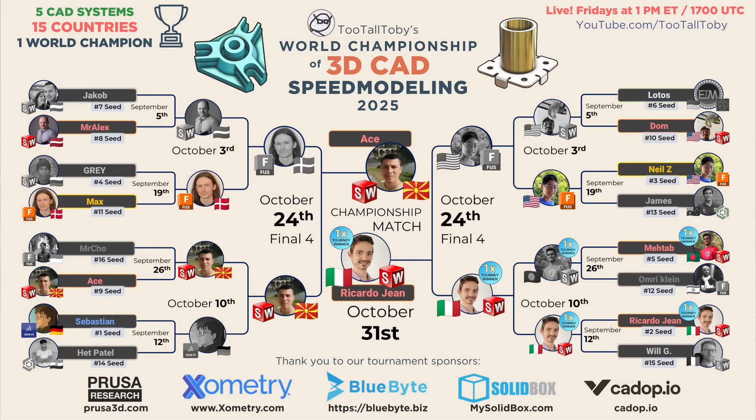All right, here we go into Battle 2 of our 2025 World Championship. Remember, you got to earn 3 points to win the title of World Champion. Ricardo Jean has 1 point. Ace has 0 points, and so every point counts.

Guys, this is one of the most memorable matches in the entire tournament. This is one that definitely left me feeling very emotional. So as you're watching, be sure to let me know down below in the comments what you think about this match. If you've ever felt the way our contestants felt, I'm trying not to spoil this, so I'll just let you watch this and enjoy it. But this is definitely a memorable one.

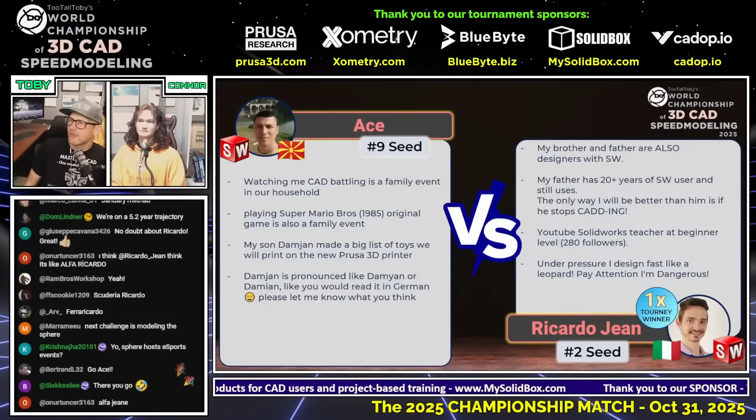So here we go. This next CAD versus CAD battle featuring Ace from Macedonia, our number 9 seed using SolidWorks, going up against Ricardo Jean from Italy, our number 2 seed running SolidWorks. Ricardo has 1 point so far. You got to get 3 points to lock up the championship of the world. Here we go. This next CAD versus CAD battle begins in 3, 2, 1.

Go! What is the mass of this multi-body part or assembly in XXX.x grams. The tolerance is plus or minus 0.1 grams. This is a multi-body part. This is a shelf that I saw when we were at PDX in the hotel. They had a shelf like this in the bathroom. There is a note on this thing.

You can see that there's a note that says, no Ivan exploit for the hole locations. Countersinks must be located properly. So no Ivan exploits for the hole locations. Of course, you can Ivan exploit anything else if you want to, but not the hole locations.

All right, this is a tricky part, a multi-body, multi-material part. This is our second part here in our World Championship. Both of our runners have already grabbed a screen capture and are already modeling. We can see that Ace is modeling this thing looking down from the top. We see Ricardo Jean, looks like he's probably doing the same thing, but it's interesting - it looks like he's actually working on the front plane, but sketching up that L shape.

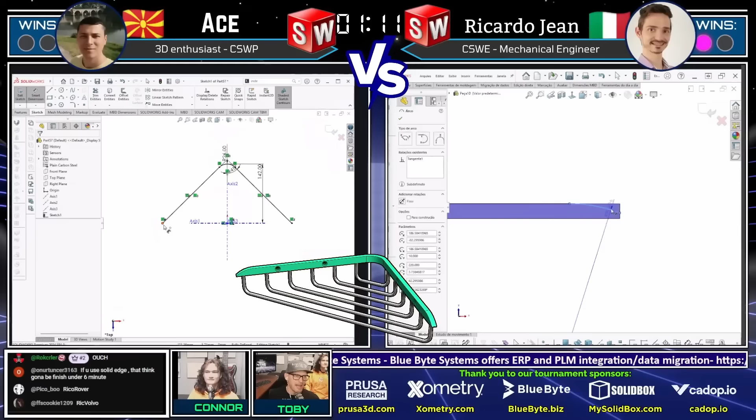Very interesting. Ricardo drawing first blood here, on the right from Italy using SolidWorks. Wow, Ace on the left decided to include that radius in that first sketch. I like that approach. Ricardo Jean now creating that little taper down with a weird radius there in the front of the model. So Ricardo Jean now taking care of that.

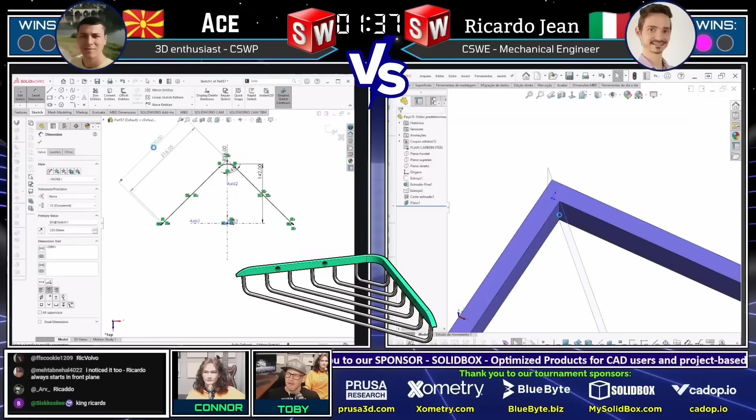I don't know if this has been used in other matchups that I haven't completely watched, but I think this is the first time I've seen an explicit rule against this kind of placement. We've had a couple of spots where we've said no Ivan exploit. For this one, this part needs to be mounted to the wall in the bathroom, and I want to make sure that they put those countersinks in the right spot. Occasionally we're going to drop that in, especially when we're here at the finals.

We don't want to see people trying to cheese the location of holes. And plus, we could learn - this is our chance to learn from some of the best, and so we want to see what tips and tricks they use to locate those holes.

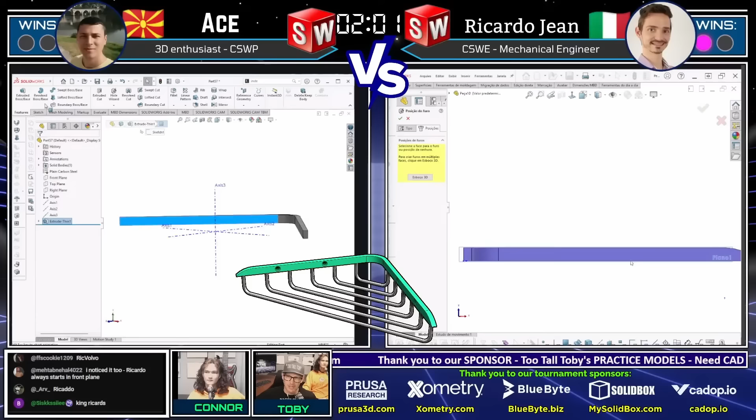So we'll see if they just do it with a sketch, or if maybe they've got a special trick up their sleeve. But here's our chance to see it. Ricardo Jean right now, as we're speaking, is going through and adding in those countersinks. Let's see how he does it.

So he adds a dimension between them, and he's just going to go pretty straightforward here. It looks like he's just adding in some dimensions. No special tricks or anything. But this is why I wanted him to do it. They got that tiny little edge there you got to select. If you select the point, you would end up with like a straight linear dimension.

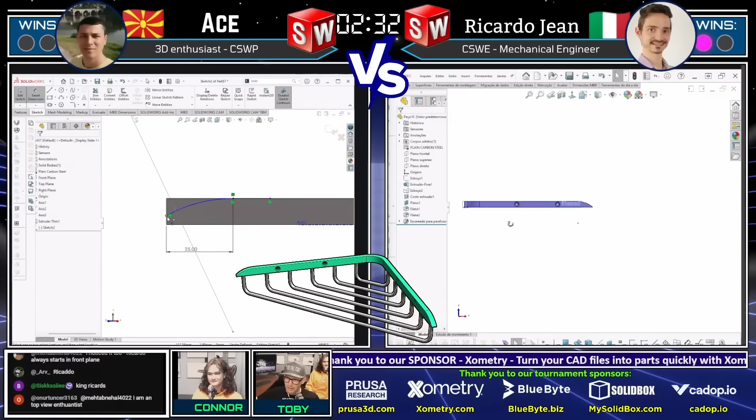And so he did have to zoom in and pick that edge, which kind of makes it interesting. And it looks like he did use a little bit of a trick there to get them centered. Hopefully he did get them centered. Even though I was talking about it, I wasn't looking, but hopefully he did get them centered. I think he got them close enough. We're going to let that go.

Yeah, I think it's sometimes funny. We will rant about how they have these crazy side tricks that they use for a lot of this stuff, or these crazy processes, and then sometimes we have stuff like this where it's just, if it ain't broken, don't fix it. You just do it normal. Yeah.

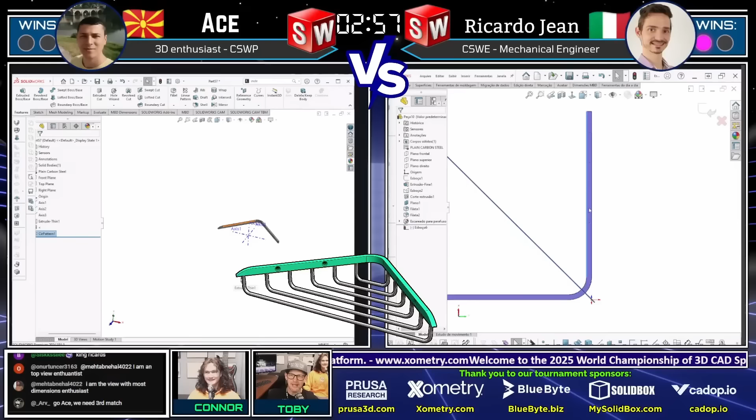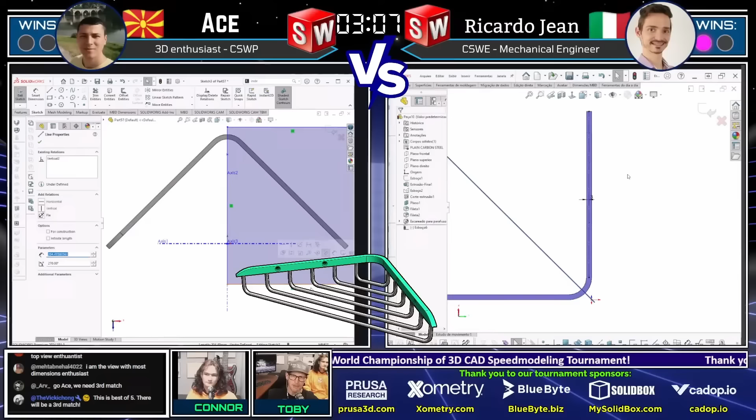So it looks like now both of our runners have that kind of curved shape on one half of the model, and we're looking to see what Ace is doing. It's interesting, Ace's got what looks like a circular pattern feature in the tree, but I'm not sure exactly what he's doing with that circular pattern.

Meanwhile, Ricardo Jean on the right is just now looking at this entire challenge and trying to come up with a game plan, because this is the ability to create those wires based on how they're defined. On the drawing, those wires are defined as having a gap, a linear distance between the wires. What's the best way to create that geometry? What's the most elegant way to get that geometry into your model and have it be correct?

And so that's why we do these challenges. We try to really put these guys to the test and see what method they're going to come up with.

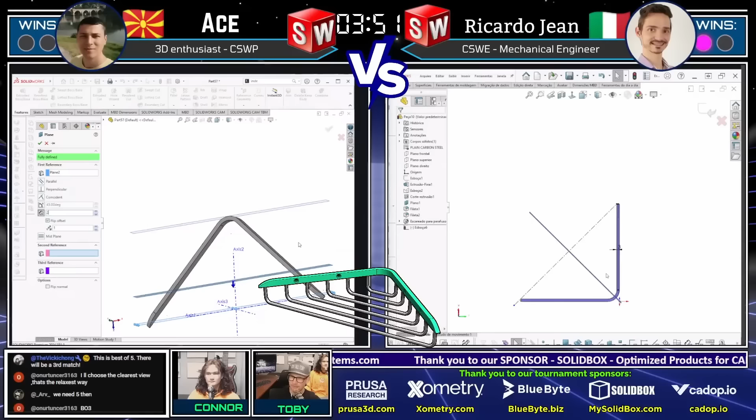So we see Ace started out there by creating a plane, and now he's using control drag to bring that plane back. He's going to be trying to figure out what the appropriate location is for those features. And we see Ricardo Jean is maybe using, let's see what he's doing for his approach here.

Very interesting. He started out kind of sketching orthogonal, but now it looks like he's trying to figure out the best way to get that geometry in place, looking down on this thing from the top. So both of our runners have to come up with a way of solving this thing.

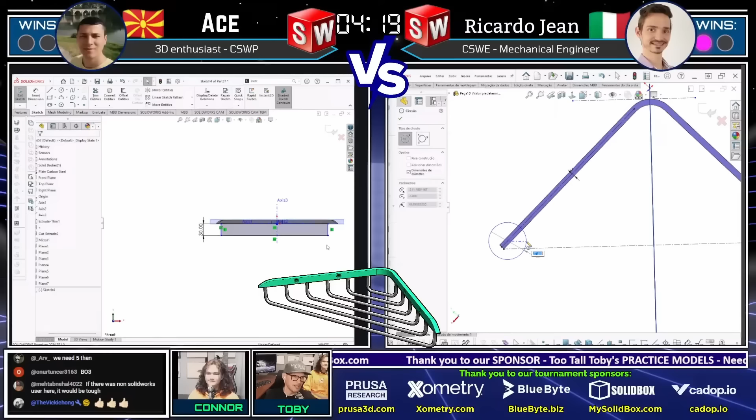I mean, this is what 3D CAD is all about. You're going to be presented with some information, and you have to know how to turn that into a 3D model, and that's exactly what these guys are trying to do here with this challenge.

It's not always easy. It's not always like, here's a plate with 4 counterbores in the corner. Sometimes you have to really think about how you're going to get that geometry in place, and a lot of times the dimensions are not necessarily the most optimal for your CAD system, so you may have to figure out different ways to calculate those locations.

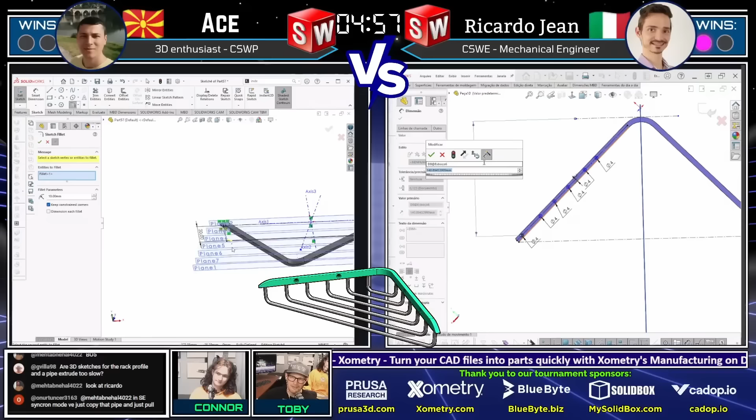So I like what Ace has done here with all these planes. I think that's probably similar to an approach that I would take, but I like what Ricardo's doing here as well, just trying to figure out where this stuff needs to be located and mapping it out. We'll see where he goes with it. But it looks like Ace is going to be the first one to actually create some geometry here.

You can see that he's gone in there and created what we would typically call a path, like if you were working in 3D CAD. We're going to see what he ends up doing with it. Ooh, looks like he's doing a little bit of copying there of that thing.

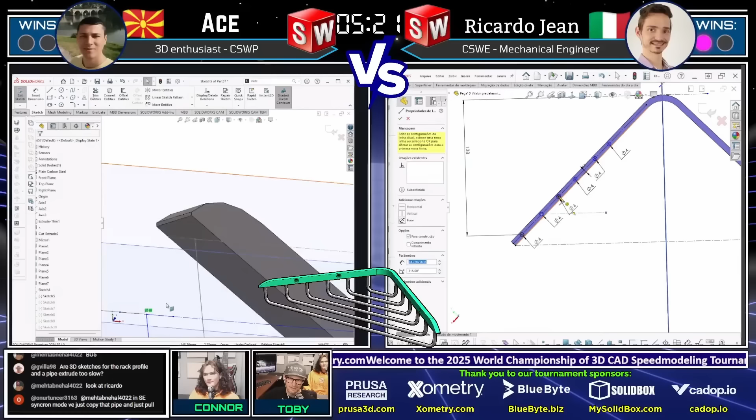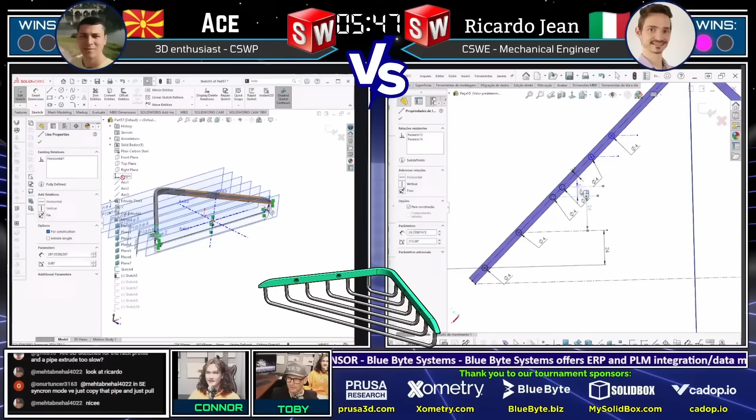Interesting, now how's he going to get it into the correct spot? That's the question. I think the order of operations for a lot of these much more advanced models, that's one of the biggest parts of being a good CAD designer, is having the experience to know the order to do it. Because I've definitely seen in earlier tournament matches that aren't the finalists, people will start up a sketch but not do it the optimal way, and it causes them so much more work cleaning up.

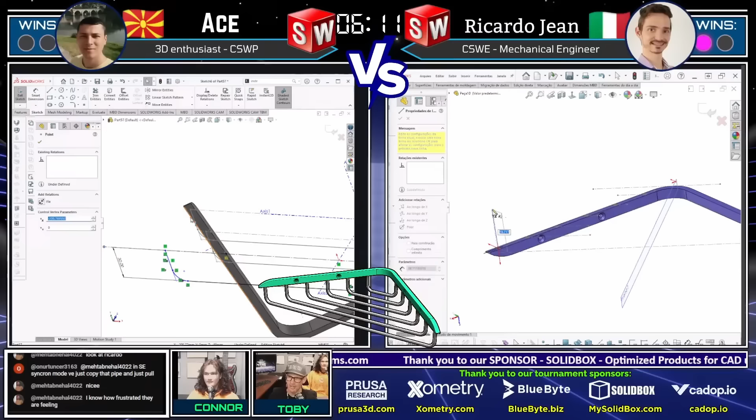I think it's neat because if you look at the first match we had, you have Ricardo and Ace just blasting through the whole 4 shelf thing. But with this one, you're seeing them take a lot more time to think about it. In the last match, that shelf thing, they were basically coming down the home stretch at this point, 6 minutes in. This one, you can see they're a lot further from the finish line at the same point. Mehtab in the chat saying, I know how frustrated they are feeling.

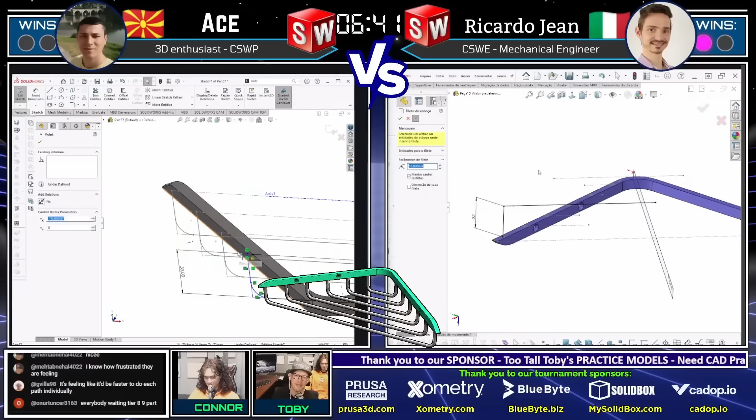The creation of these features is also going to be based on the drawing. A lot of times the drawings I provide, we have to do what we can with the space that we have, so they're not always going to be exactly to an ISO standard or an ANSI standard. But that's how engineering is—a lot of times you'll get a hand sketch, a napkin sketch, and you have to figure out and interpret how to turn that. Or maybe you'll see a real world part and try to figure out how to interpret that back into a SolidWorks model.

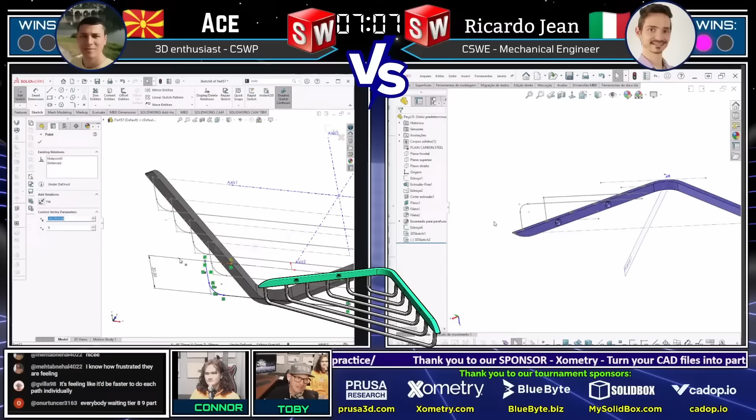Like I said, I saw this physical part when we were at the hotel at PDX a couple weeks ago, and I thought, well, how would you actually model that in 3D CAD? That's what it's really all about—being able to look at just about anything in the world and know right away how you would take that thing, whatever it is, and turn it into a 3D model. It's a big part of what we learn in the Too Tall Toby community, and I think we're seeing a couple of guys here who are real masters at that skill.

Mehtab in the chat says, looks like Ace has more work done. Yeah.

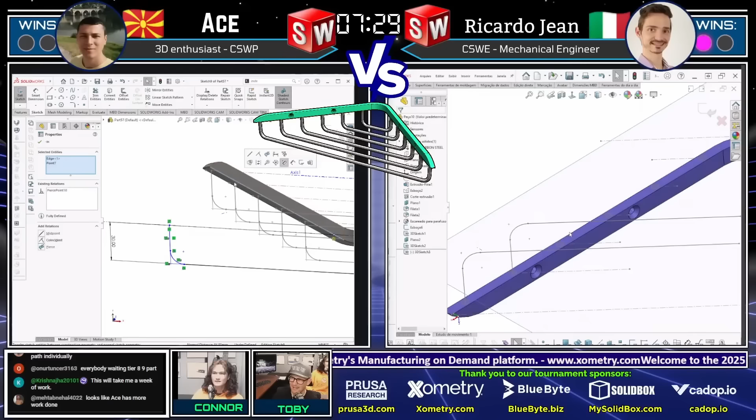Let's see, Ricardo is using a 3D sketch in SolidWorks. You can see that Ace decided to create some planes, and he's doing most of his work in 2D sketch mode, which I think is usually a little bit easier, a little bit more intuitive. But Ricardo is using 3D sketch mode, and now look at Ace—it looks like he's been able to construct all those paths, which Ricardo is still running down here.

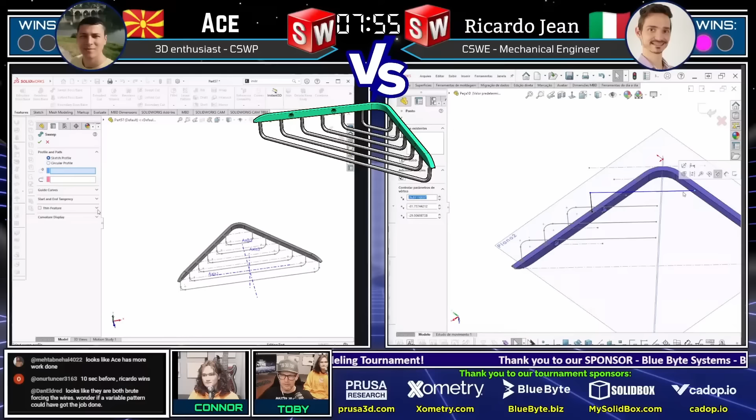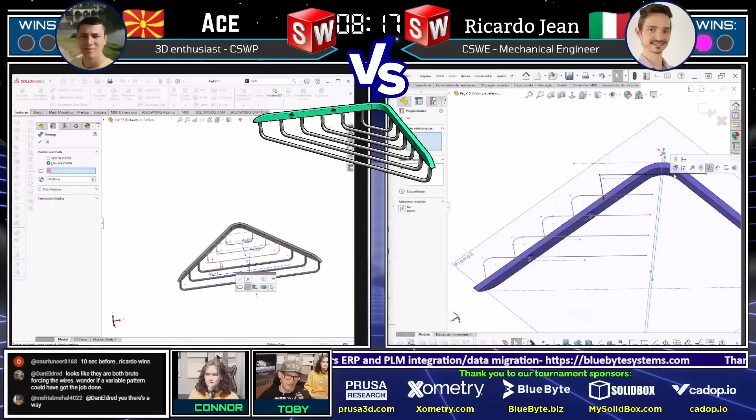Now, is he going to have to create a circle for each of those and then bring that circle over? Nope, looks like in SolidWorks he's using the option for circular path, circular profile, and just picking the sketch. Wow, he's going to make short work of these things if he keeps using that tool. You'll notice he's also using a shortcut to repeat the previous command. That's one I think is really important to learn in your workflow—these over-and-over-again types of applications come up often in 3D CAD, and learning how to quickly cycle through them can be a real nice time saver, which we see him doing here.

He's not rotating the view, he's not zooming in and out. He's got like a perfect view where he can just do all this work and kind of do it in batch.

And that is a really important skill when you're working. Mehtab in the chat saying enter key for the win. Yeah, exactly, you just press enter to get that to repeat. That's a really important skill to learn.

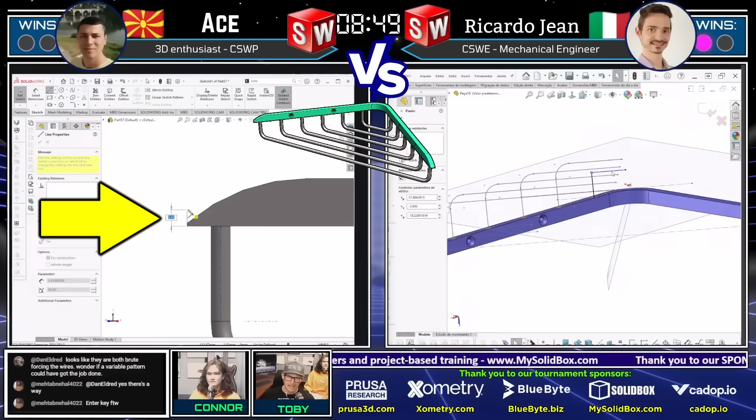Now we see it looks like Ace is kind of coming down the home stretch. Now look at this, he's using an auto dimension to define the height location for these hole wizard holes, and then another auto dimension to define the horizontal location just using construction lines. That's going to set him up now to go into hole wizard. Look how quickly he was able to get those located. That's the kind of shortcuts that I'm talking about. That is a really cool shortcut.

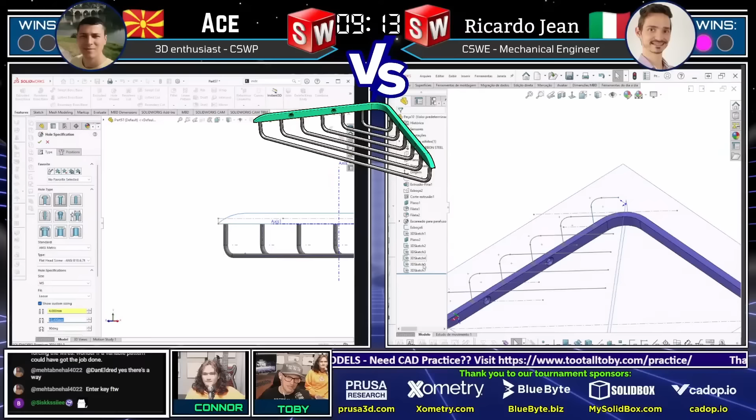So now look at how quickly he's laid out the geometry for these hole wizard holes. He knows exactly where they need to be positioned, and he just did that using a sketch and auto dimensions instead of doing it the way Mehtab did it, where he kind of manually went in and added those dimensions. I really like that workflow, and I'm so thankful that Ace showed us that here in the live stream.

So cool, so now he's going to try and get that geometry over. Oh, look at that, he had a plane going down through the middle. Ooh, so Ace was able to mirror that across. Wow, this is a real clinic on shortcuts here. This is really, really cool to watch.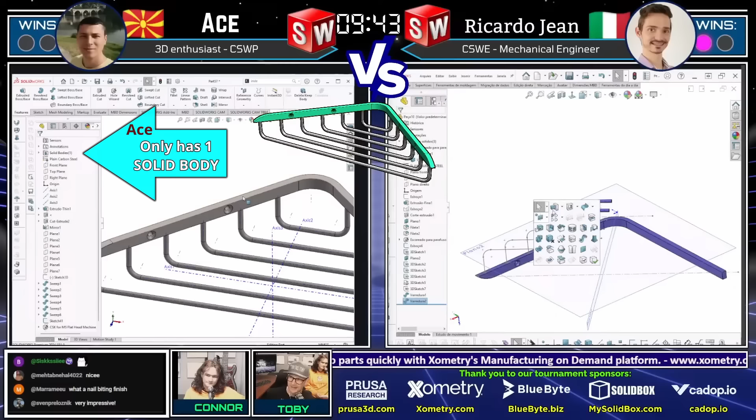Very, very impressive. Yeah, I agree with what Sven is saying in the chat there. And Marrameu is saying, what a nail-biting finish. Yeah, this is really, really getting close here. So we're now watching to see what else needs to be done here, watching to see what Ace is doing.

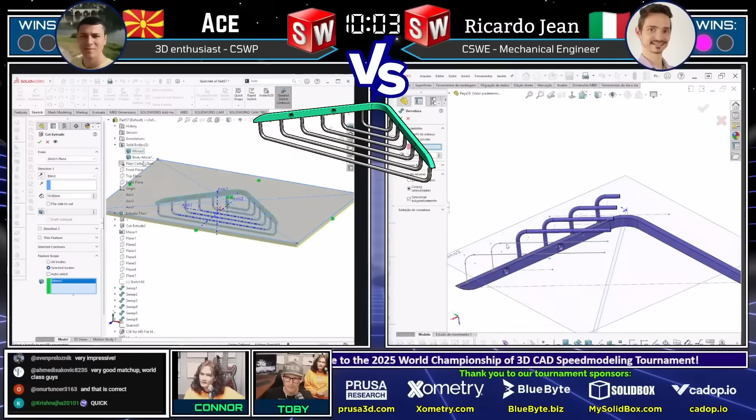I'm not actually sure what's going on with this feature. Maybe there was some extra geometry that he didn't realize he had, I'm not exactly sure what's going on here. Maybe he's double checking, making sure that he's got everything in the right spot.

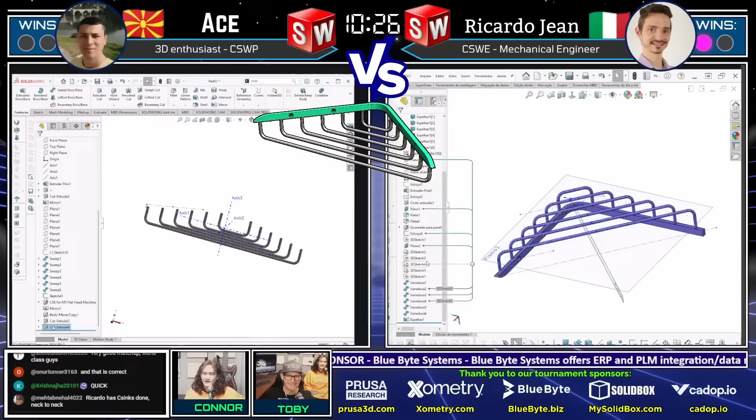This is one of the unusual matches you see, especially among these two, where normally you just see them do the first half and you don't think anything's happening, and in the second half everything's happening. But it looks like with this one, it's a very slow and steady kind of design from both of them.

This is really interesting, I'm not really sure what Ace is up to here. I'm not sure if he's trying to split the models. It looked like he was really cruising along there.

I'm also a little worried now. I saw he got that SolidWorks spinning ring of death, that would be catastrophic here if that was the case. Oh no! Oh, is he freezing up? It says he's saying that he's freezing. Oh no! This is the worst case scenario.

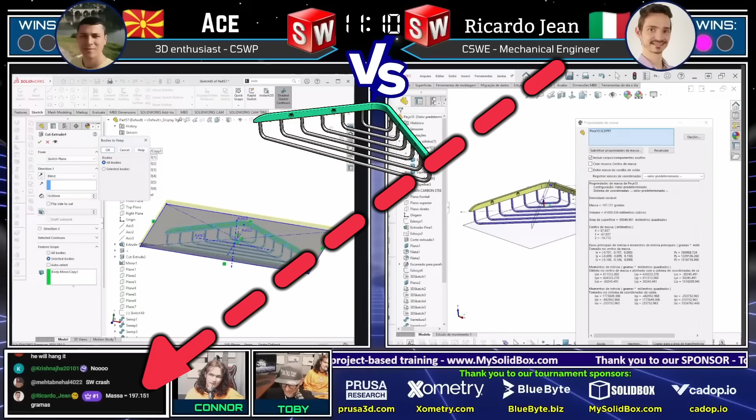Oh man, all right, we're going to watch the chat. Ricardo Jean comes in with an answer, 197.15 grams, and that is not correct, that is not correct within tolerance.

And Ace, we're watching Ace, we're watching the chat, we're watching his screen. Ace was on such a good run there, and this is absolutely catastrophic.

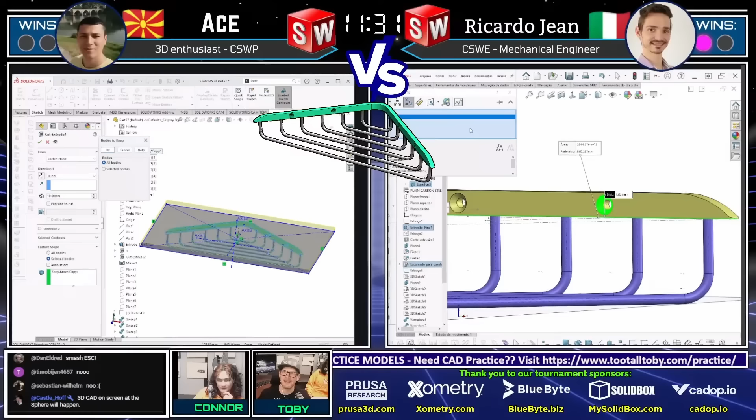And guys, this is real world. I mean, we've all been in the situation where you're running in SolidWorks for a while, you haven't saved in a while, and you go to do something, and then SolidWorks crashes, and it's really unfortunate. Yeah, bad advertisement for SolidWorks, says RIT. Really, really unfortunate. Okay, should have had a SolidBox.

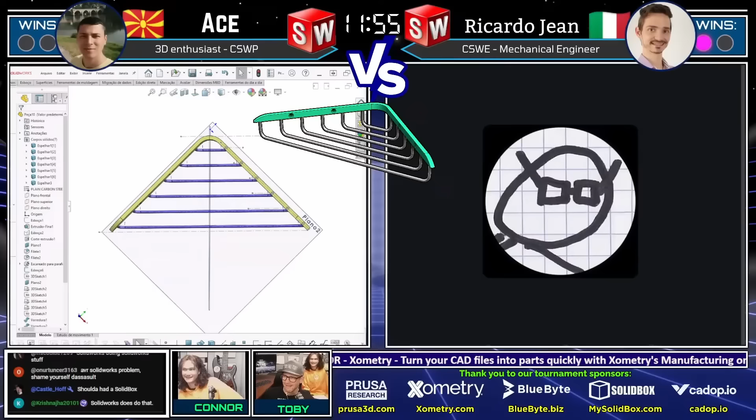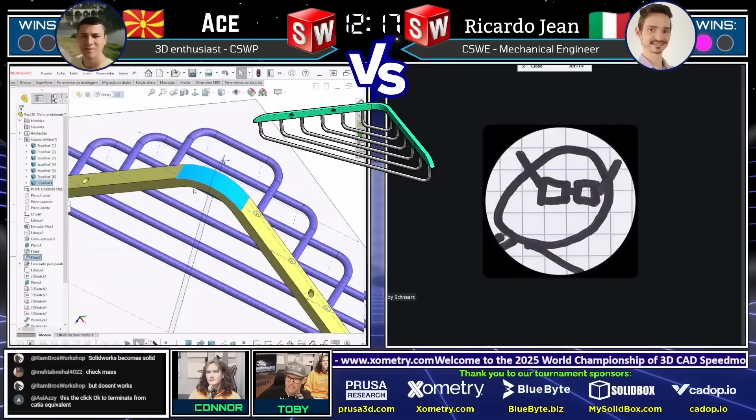Is he back? Is he? Oh wait, or is this somebody else's screen? Let's see here. No, he's not back, that's Ricardo's screen. So he actually dropped from the chat as well, he dropped from the meeting. So we're going to keep an eye on the meeting, but we're going to let Ricardo keep running. Right now it's actually Ricardo that's on that other screen. I'm trying to see if I can get Ricardo to show up back on the first screen, but let me see if I move this over just for now.

Looks like a computer crash from Ace, maybe a computer crash. Maybe he did a full restart.

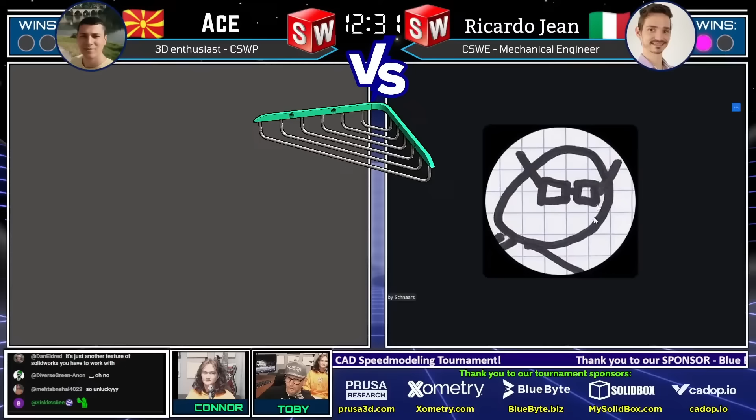So we're trying to see what we can do to get Ace back in here. We're keeping an eye on it. I mean, he's still in the meeting, but he's not showing his screen.

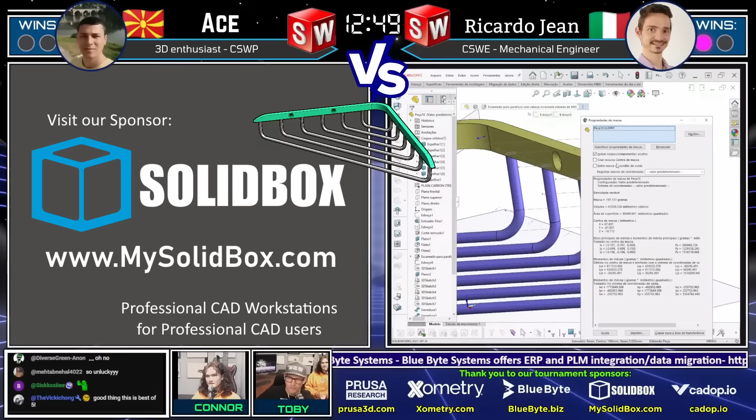Yeah, should have had a solid box, says Castlehoff. Yeah, we agree with that. And man, Ricardo Jean's still going through, still trying to come up with the correct answer. We see that Mehtab says, I wonder if he saved the model. We're waiting to see what's going on with Ace. But man, so unlucky. Mehtab says, yeah.

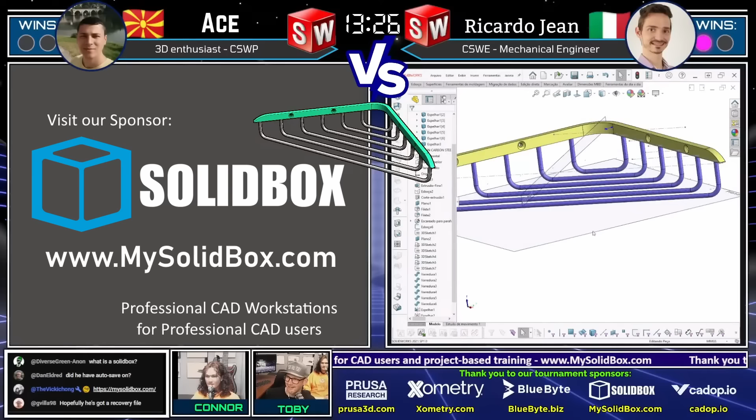And with Ace crashing, we're having a little tongue in cheek here, having a little fun. But G Villa saying hopefully he's got a recovery file.

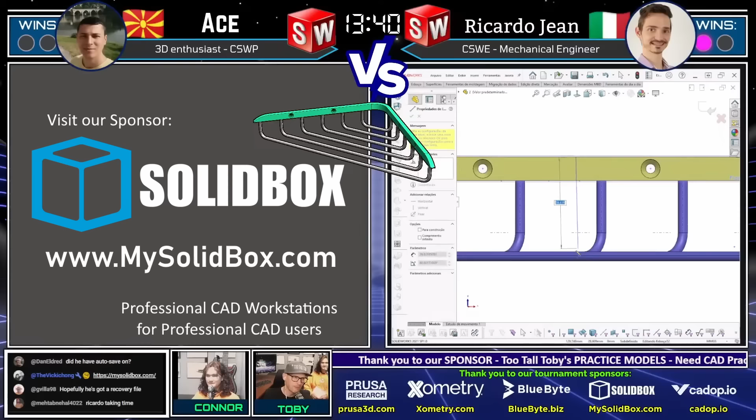Yeah, you can go into your options, Ace. You can look in auto recover. We're gonna do a little on the fly tech support here, Connor. Yep, you can look at your options for your location for your auto recover file. If you do have one, you can rename it to a .sldprt, and that will let you actually open that file if it doesn't open up in the bin.

But interestingly, Ace is still in the meeting, in the web meeting, but his screen is not shown. I think that he's trying to maybe get SolidWorks back up and running.

Wow, so I mean, it's good that this is a best of 3. But guys, don't forget, Ricardo has not yet earned the point. There's something going on with Ricardo's setup that has got him stuck. And if Ricardo doesn't answer it, maybe we'll give Ace a clock of doom and we'll give him a 5-minute speed run and see if he can still get it.

JK Cam says his boss walked into the office and he had to alt tab. Oh yeah, been there. We've been there. Yeah, that's we've been there for sure.

Complex model for SolidWorks, I hope this isn't considered a complex model. SolidWorks is like 30 years old. Yeah, I think they should be able to handle this, but maybe you're right. You never know. Clearly, it is struggling with this.

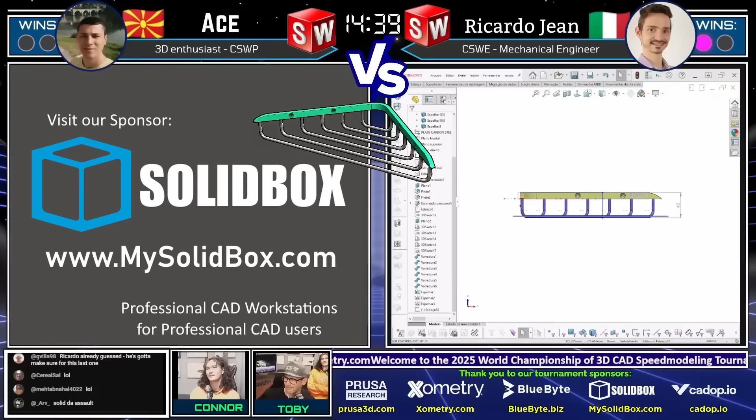Yep, we're getting a lot of feedback here in the chat about what we think about SolidWorks stability. Good thing this isn't Yelp. We've all been there, yeah.

He was on such a good run too. He was on a good run, but you know what? It's not over yet. Like I said, it's not over, and Ace is a fantastic competitor, and we're going to let this thing play out. We're going to see what happens.

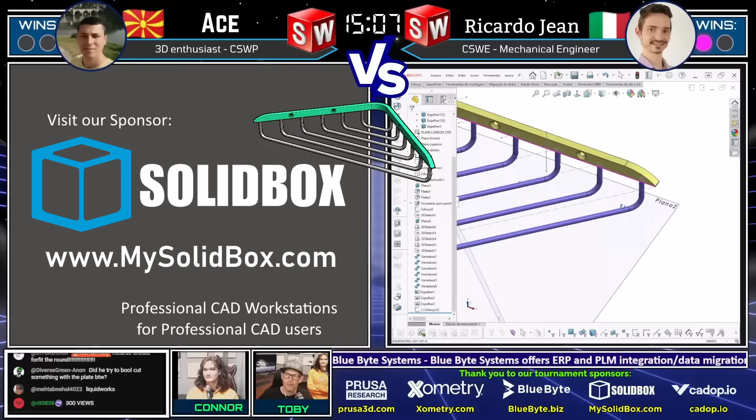Looks like we're back to 300 viewers, so right now what's happening, if you're just tuning in, Ace was closing down on the correct answer, or at least on an answer, and unfortunately his SolidWorks crashed, and when his SolidWorks crashed, that knocked him out of the match, and we're waiting to see if he comes back in.

Meanwhile, Ricardo Jean is trying to come up with the correct answer, and Ricardo Jean comes up with his second answer here, which is 192.447 grams, and that is not correct. Ooh, I'm sorry, Ricardo Jean, that is not correct.

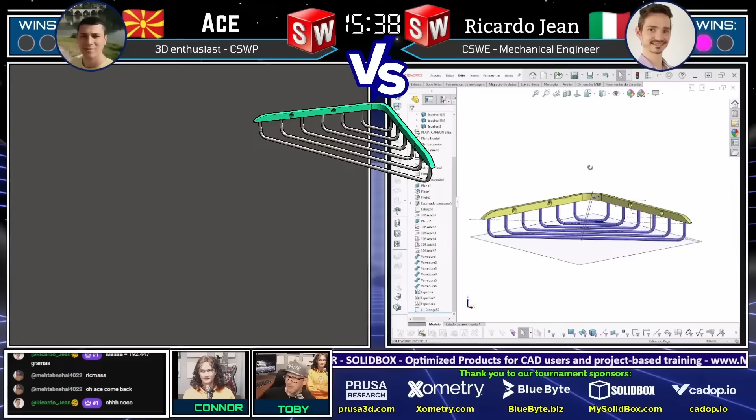And so we're still waiting here to see what's going on with Ace. But I think what we're going to do is we are going to bring up the clock of doom, just because Ace's been a friend of the channel for a long time, and we want to make sure that he has a chance here to get in. But the problem is Ace's not even in the meeting right now. And so I just want to kind of see if he's like getting SolidWorks rebooted or anything.

Ace said that he's in here in the chat. He isn't here in the chat. Is that what you said? Yeah, up there. I am here. I am here, okay good. So we just need to get his screen sharing, and we need to see what he's up to. It says he's in the chat.

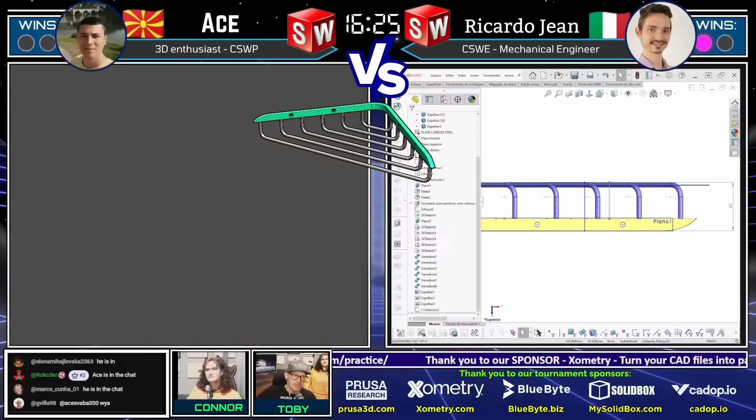Ace, if you can take a second and share your screen, we will bring up the clock of doom, and we're going to give you a proper go at this thing. But he is back here in the chat. And Ricardo Jean has answered twice incorrectly. This is the World Championship of 3D CAD speed modeling that we're watching here. We're just waiting for Ace to show his screen so that we're going to bring up the clock of doom as well. Ace is saying that he's in, so let's go ahead and just bring it up.

The clock of doom, and here it is, the clock of doom. And it looks like, yep, Ace was able to get his screen showing again. So nice, let's show Ace over here on the correct side. Let's see where he is. Oh boy, he's back at the beginning, and he's got 4 minutes and 50 seconds.

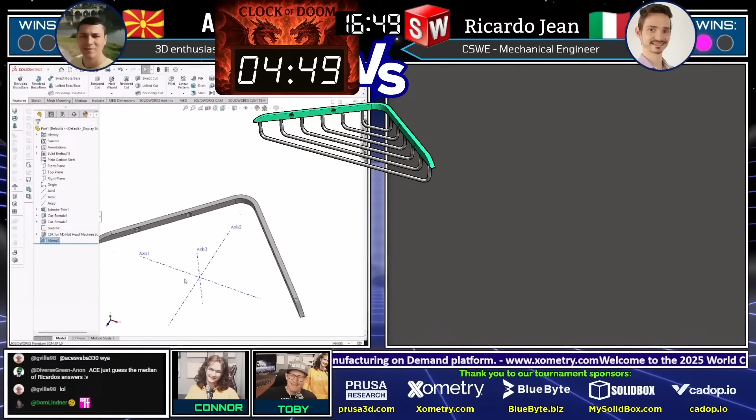And guys, this is going to be really interesting to watch. He's gonna truly be speed modeling here against the clock of doom. We're gonna put Ricardo Jean's screen up here on this side. Clock of doom is up and running, and this is the World Championship of 3D CAD speed modeling. And good luck to Ricardo.

We're trying to move this out of the way so we can see what's going on. Yeah, we got SolidWorks, we got LiquidWorks. So now all we need is VenomWorks. VenomWorks, we can get Big Works. If you guys get my reference, you get my reference.

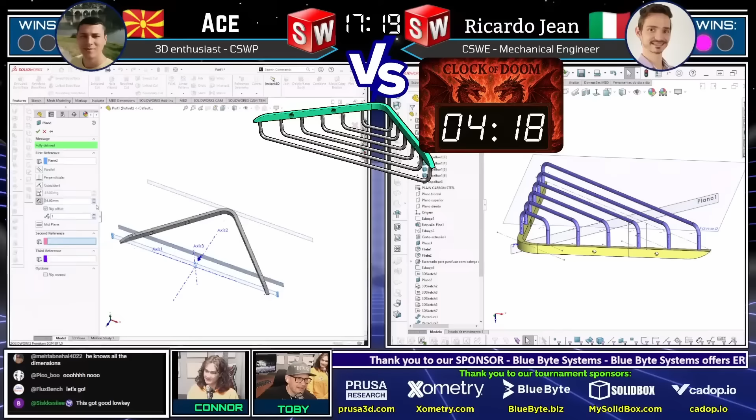And let's bring up the print here as well, so if anybody's watching from home, they can kind of keep an eye on what's happening, keep an eye on the action. But wow guys, this is a really cool part, not an easy part, and good luck. Good luck to our one remaining runner.

The way that this contest works is that if you answer twice incorrectly, you are no longer able to answer and earn a point, but the other person still has to earn the point. So we bring up what we call the Clock of Doom.

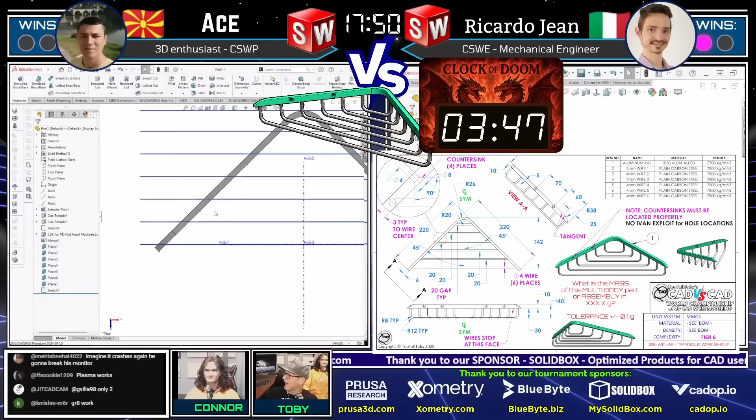Yes, and with the Clock of Doom up now, it's going to be up to Ace to see if he can assemble this thing in just 3 minutes and 44 seconds. And wow, he's had a chance to do it once, so he should have, at least he's got his game plan worked out. But wow guys, this is intense.

Yeah, Gasworks and Plasmaworks. I was actually making a Metal Gear reference, but Gasworks and Plasmaworks, I guess, would be the two other works that we could have.

Yeah, wow, and Ace taking a slightly different approach this time. He looks like he's just kind of blasting through, trying to get a usable end point there that he's going to be ultimately probably putting his center points upon. I think that's probably what he's going to be doing here.

It's kind of interesting now that it's just Ace, it gives us the ability to kind of talk a little bit more freely about strategy. So this is pretty cool. Really interesting to see how he's doing this and what exactly he's trying to accomplish.

It's also, I think this might be a unique scenario where we have a runner with the knowledge of foresight, because I don't know if it was the correct one, but he almost had it completely done. So maybe this is when he was restarting SolidWorks, a faster way of designing it. But yeah, it's going to be really interesting watching this.

It's going to be interesting. This is going to be a tough one. And this is tough, this is tough.

And so Ricardo Jean has answered twice incorrectly. Ace ended up having a crash a little bit earlier. So if you're just tuning in, this is the World Championship of 3D CAD Speed Modeling. You have to earn 3 points to win the World Championship. And we've been looking at this challenge for the past 20 minutes.

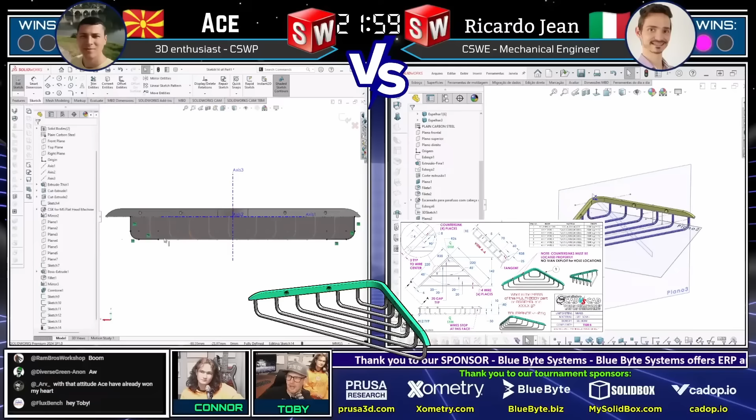The Clock of Doom has expired, and I'm sorry, Ace, but you are not going to be able to earn the point for that challenge. But wow, what a good matchup. What an interesting matchup. And guys, this is a chance for all you in the audience who are modeling these things along with our runners to truly flex. And let's see if you were able to get it. This is your chance to type in the chat and let us know what you think the answer was.

And so RamBros Workshop, our world champion of 3D CAD speed modeling, types in his answer, 193.7. That is not correct. Ooh, that is not correct. And Lotos from Ukraine running Compass 3D, 194.6. That is not correct, not within tolerance, but it is very close. Very close. Very, very close. And let's see here, we got...

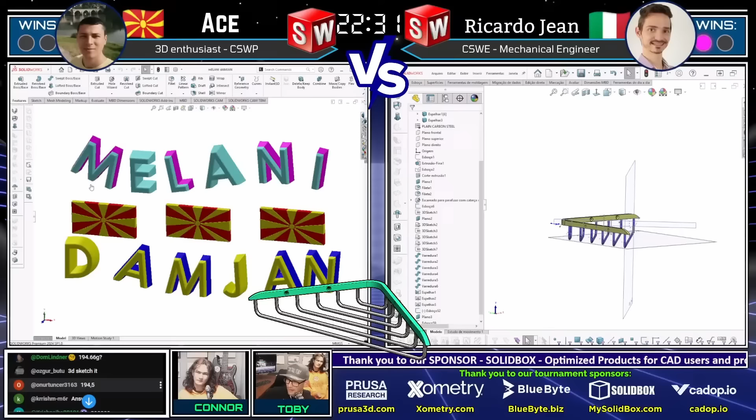Let's see here, Onur Tuncer coming in with his answer 194.5, also very close but not correct. And Sebastian coming in with his answer 194.6, also very close but not correct. Lots of people coming in with that answer. 197.57, also very close but not correct. Guys, the correct answer is 194.8. So guys, very, very close.

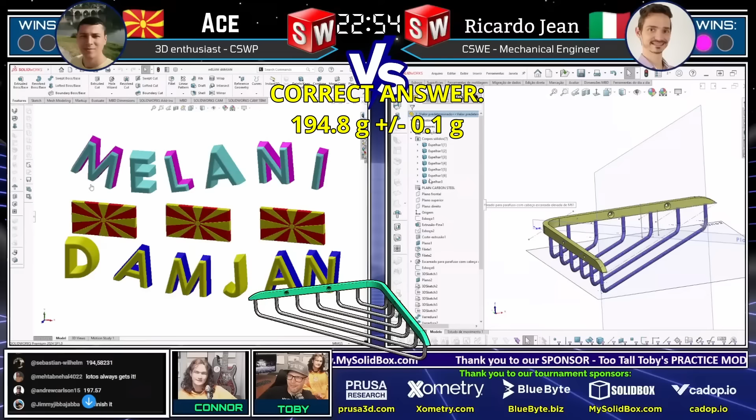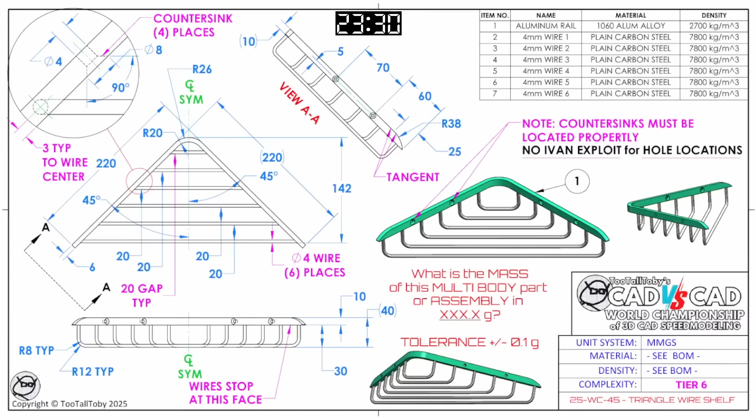And we have a note here in the chat. It says Javimula88 was within tolerance. Let's take a look. Let's go back, we'll recognize if that's the case. 194.6, 194.8 — it's plus or minus 0.1.